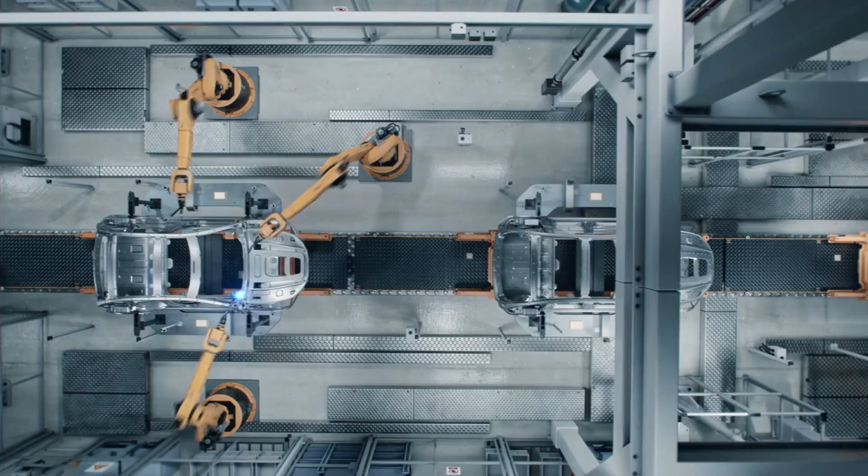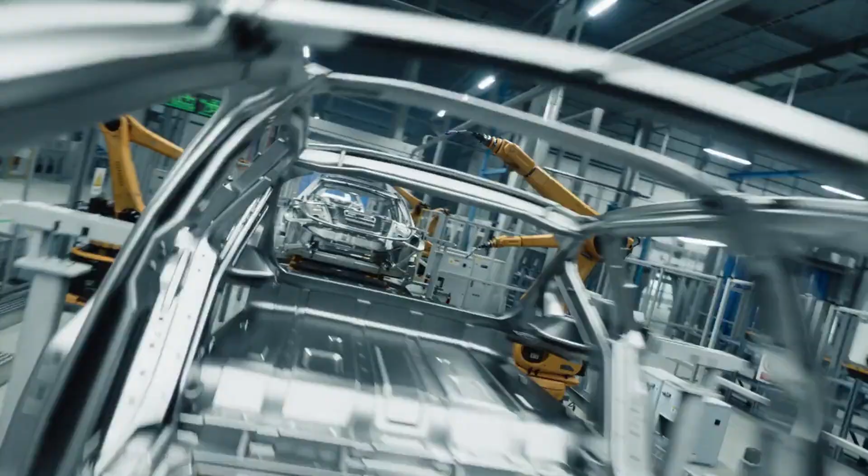A car is not a single product. A car is the result of thousands of tightly synchronized processes, all happening in the correct order, with tolerances measured in fractions of a millimeter and timing measured in seconds. Every day, thousands of vehicles roll off production lines.

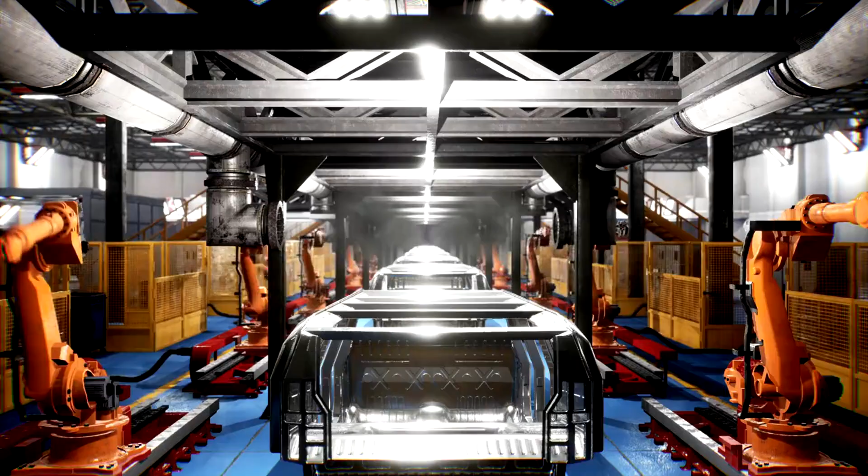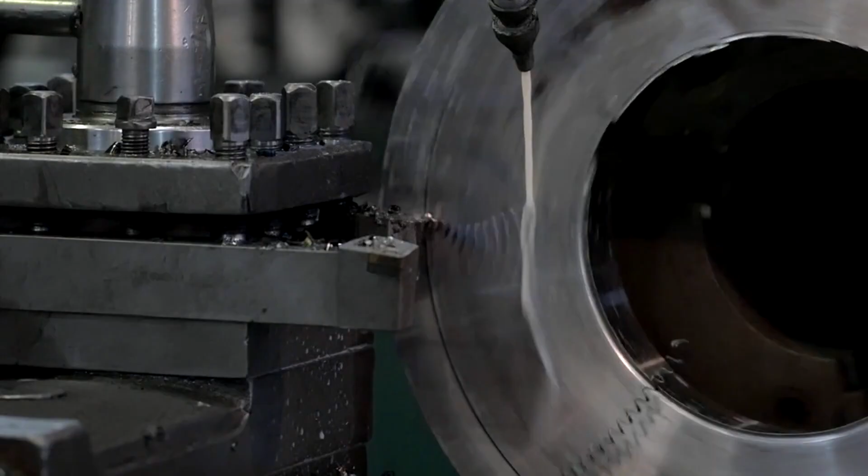But behind this seemingly routine output lies one of the most complex industrial and logistical systems ever created. When we look at a finished car, we see paint, wheels, lights, and an interior. In reality, the car's story began months earlier, long before the first visible part reached the factory floor. By the time physical production starts, everything is already decided: which steel grades will be used, where each component will come from, when it will arrive, and at which exact second it will be installed.

One disruption in this chain can stop an entire factory, costing millions in lost production.

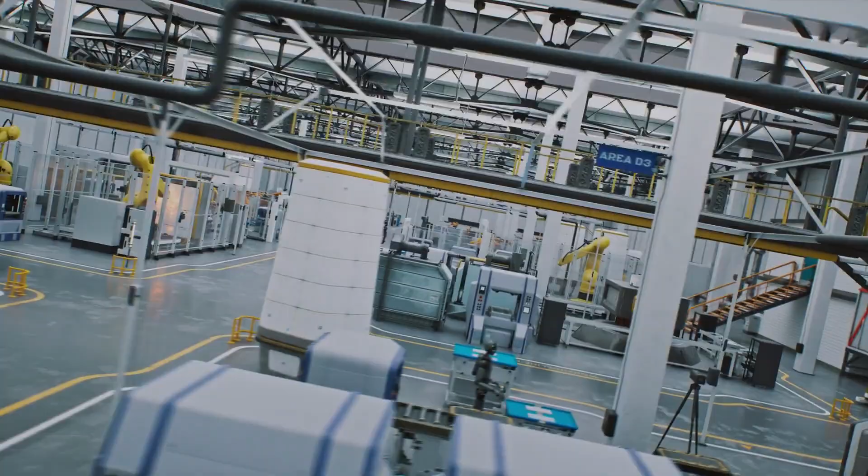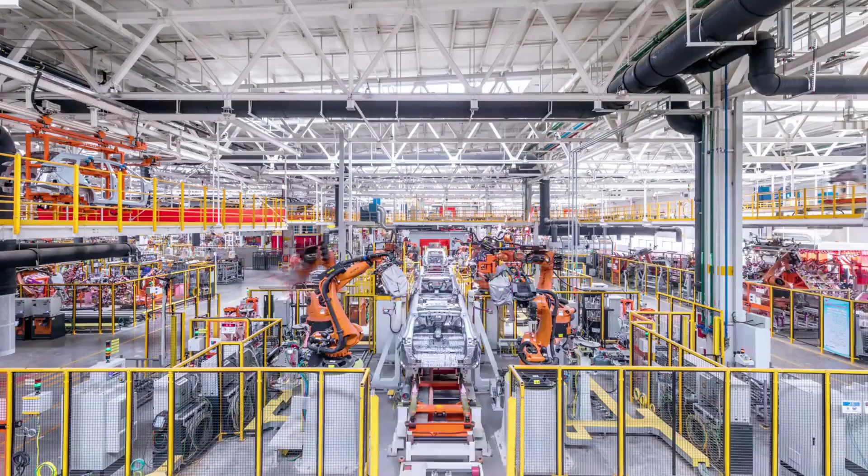The first key thing to understand is this: a car is not built start to finish in one place. It is assembled from components produced in dozens or even hundreds of factories across the world. The engine may come from one country, the transmission from another, electronics from a third, and final assembly from somewhere else. A car manufacturer is less a single factory and more a conductor coordinating a global orchestra. Modern car production is highly automated.

Robots stamp metal, weld structures, paint bodies, and move components with precision no human could match. But humans have not disappeared from factories. They are essential where flexibility, judgment, and quality control are required. No two cars on the line are exactly the same. Different engines, trims, colors, software configurations all flow down the same line.

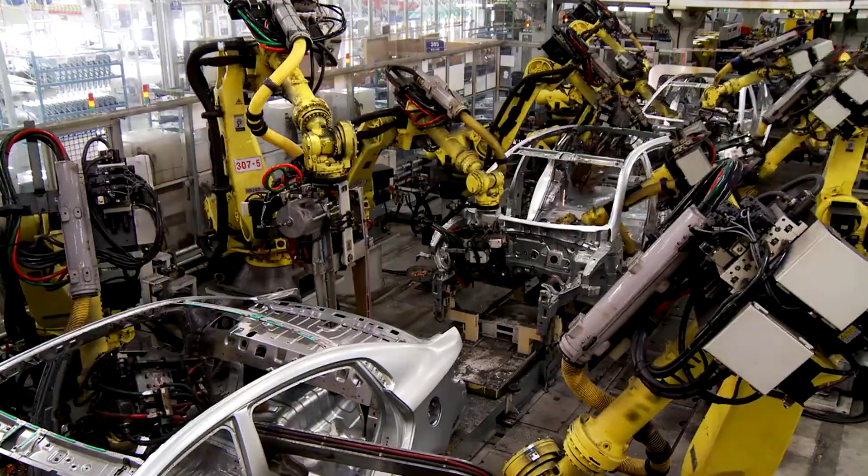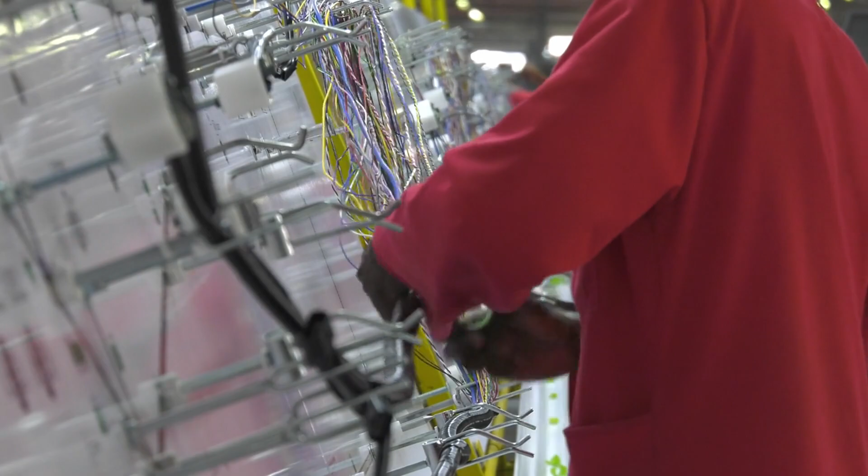There is also a major shift most people underestimate. The more modern the car, the less mechanical and the more digital it becomes. Car manufacturing today is not just about steel and bolts, but about electronics, sensors, wiring harnesses, control units, and millions of lines of software code that must work perfectly from the first start.

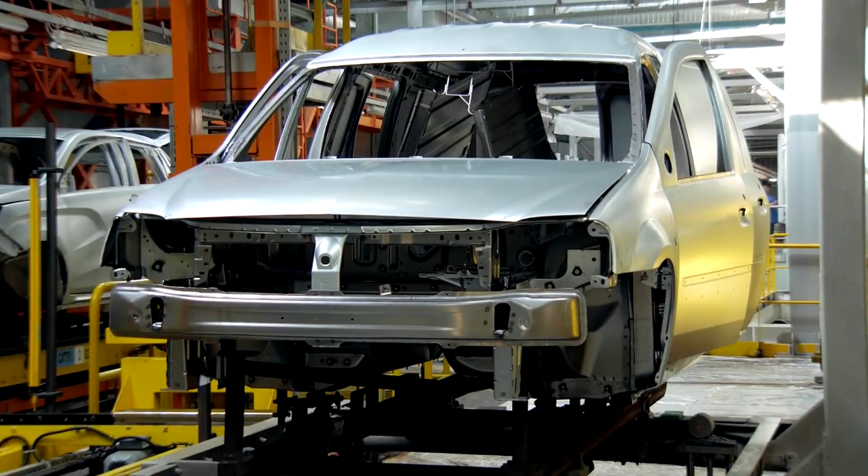Before a car ever looks like a car, it must first become a structure. The body is not just an outer shell, it is the backbone of the vehicle. It determines safety, rigidity, handling, noise levels, and long-term durability. If something goes wrong here, it cannot be fixed later. Everything that follows depends on this stage being done perfectly.

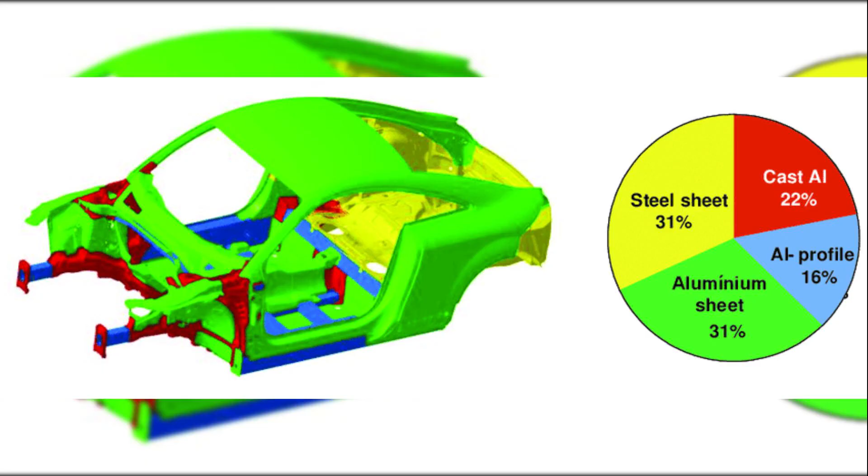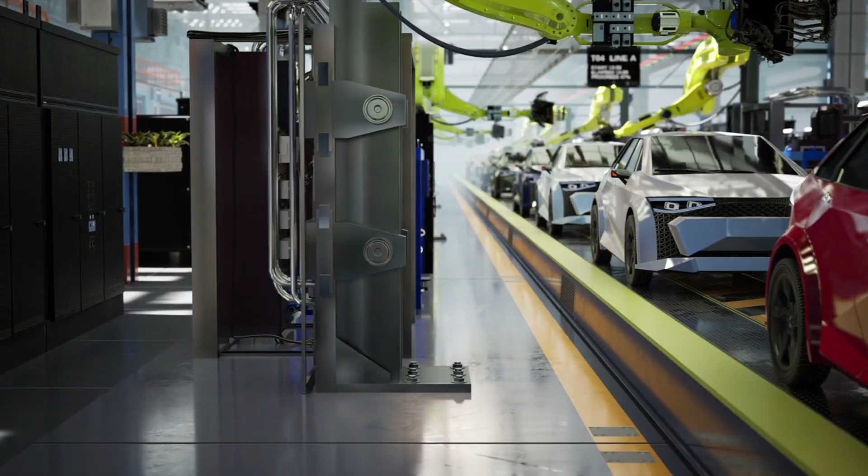Modern car bodies are not made from a single material. They are a carefully engineered mix of different steels and lightweight alloys, sometimes combined with aluminum or advanced composites. Ultra-high-strength steels are used where passenger protection is critical. Softer, more ductile steels are used where controlled deformation is needed during a crash. Lighter materials are added where weight reduction matters. Every square centimeter of the body has a specific mechanical purpose.

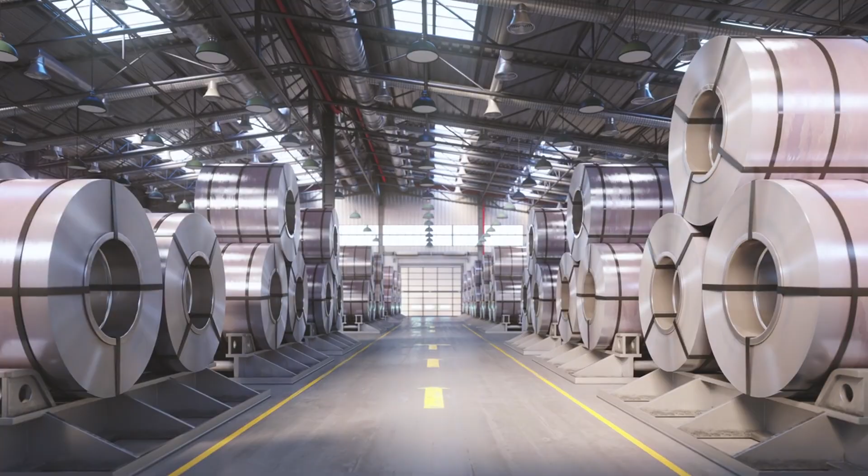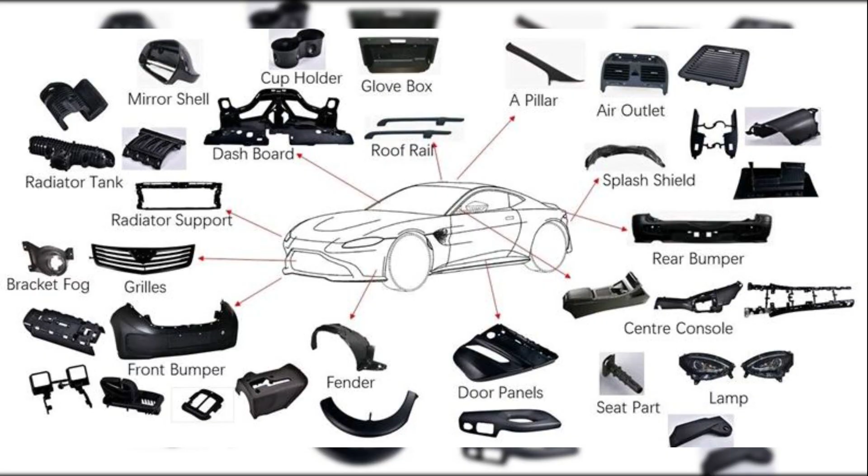The raw material arrives at the factory in massive coils of metal sheet. Each coil has a precisely defined thickness, chemical composition, and strength. These are not generic materials. Each sheet is designed for a specific part of the car: doors, roof panels, floor sections, pillars, or structural reinforcements. Using the wrong material in the wrong place would compromise safety or durability.

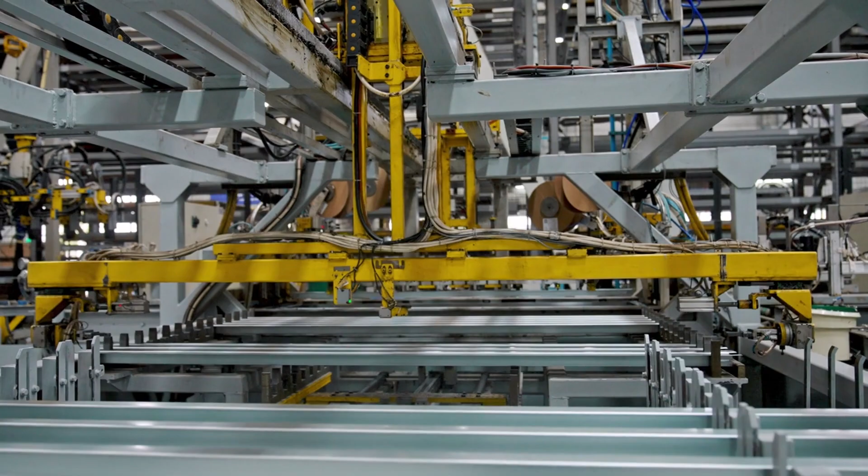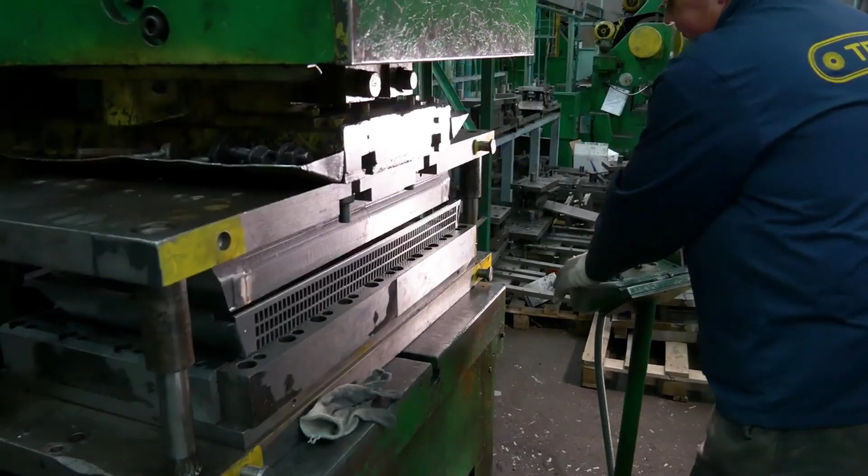These metal sheets then move into the stamping plant. This is where flat metal becomes three-dimensional. Huge presses, often weighing tens of tons, shape the metal using carefully designed dies. It is a sequence of controlled forming steps, where the metal is gradually stretched and bent into its final shape. The goal is to change the geometry without weakening the material or causing microscopic cracks.

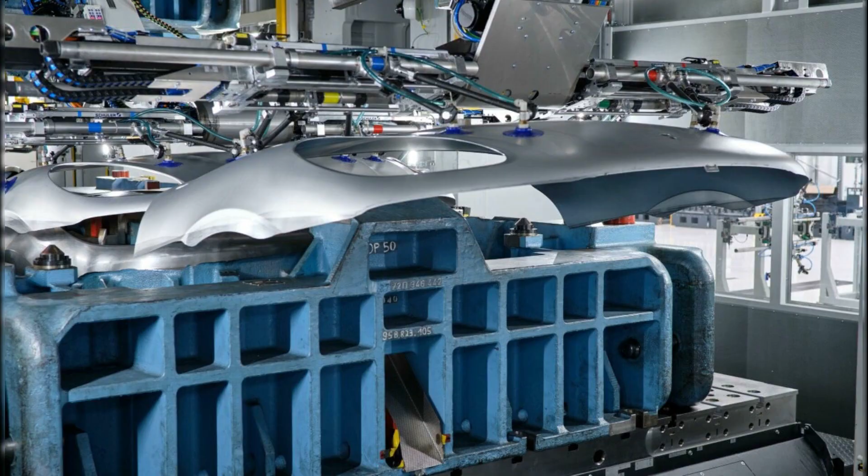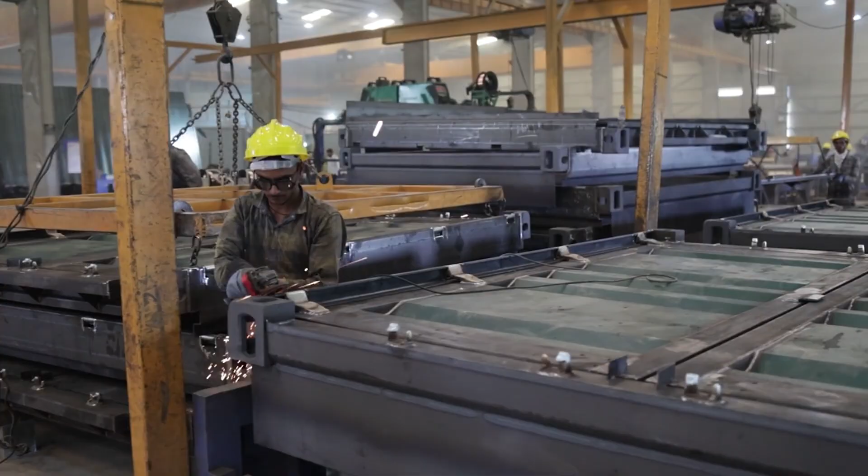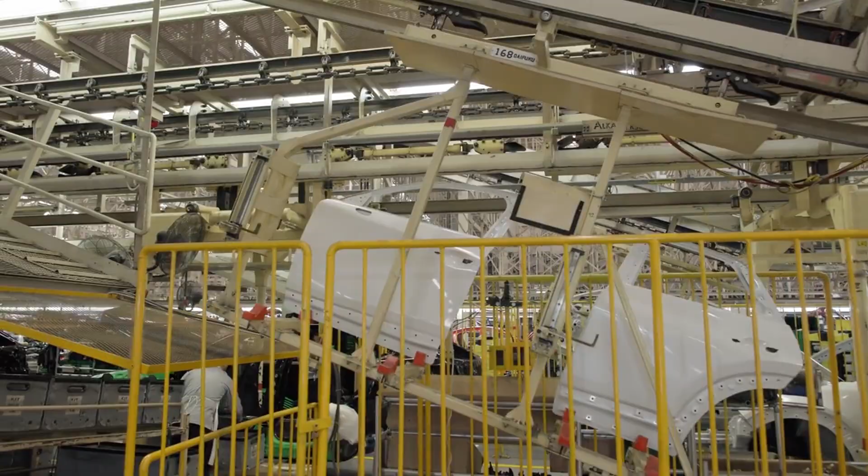Every stamping operation is monitored in real time. Sensors measure force, displacement, and material behavior. If the metal stretches too much, it tears. If it stretches too little, the shape will be inaccurate. Any part outside strict tolerances is immediately rejected. A defective stamped panel is not a cosmetic problem. It can prevent proper welding, cause misalignment, or weaken the structure.

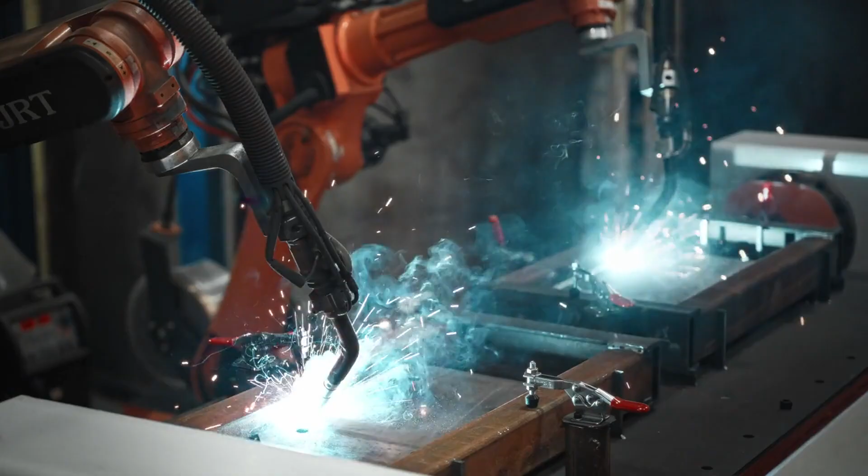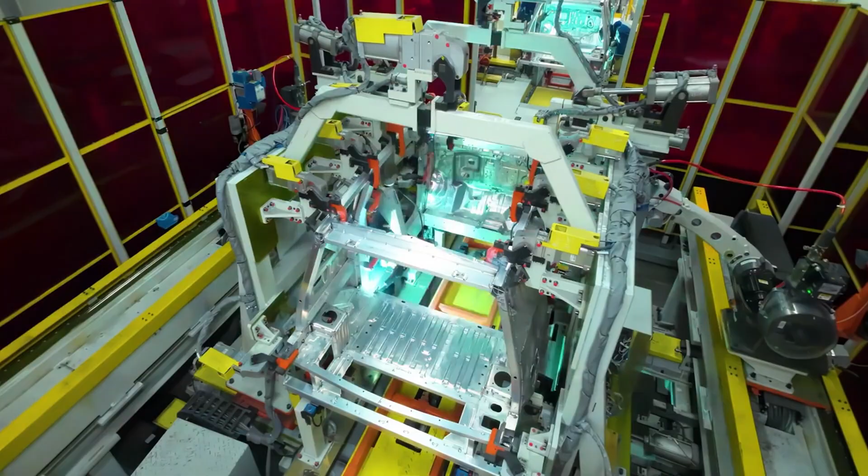Once individual panels are stamped, they move to body assembly. Here, dozens or hundreds of separate metal parts are joined together to form a complete body structure. Industrial robots perform thousands of spot welds along with laser welding, riveting, and structural bonding. Modern car bodies rely heavily on adhesives, not as a substitute for welding, but as load-bearing structural elements that increase stiffness and improve crash performance.

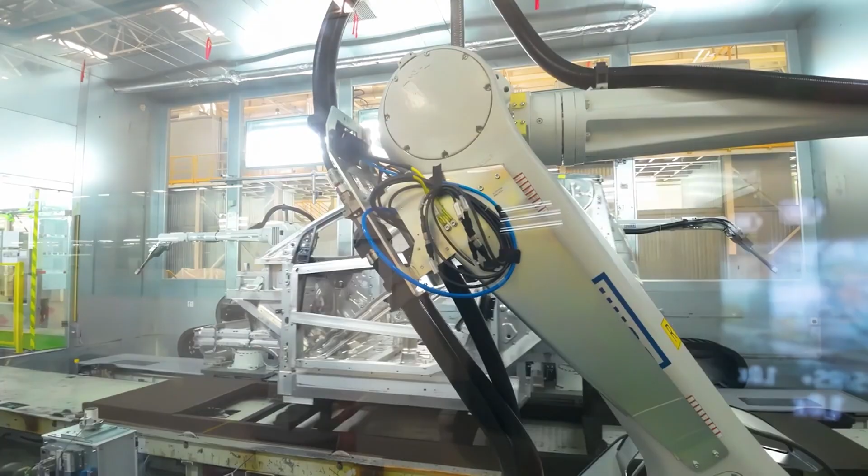Precision is everything. The geometry of the body must be exact. Even a few millimeters of deviation can cause doors not to close properly, windows to misalign, or suspension mounting points to shift.

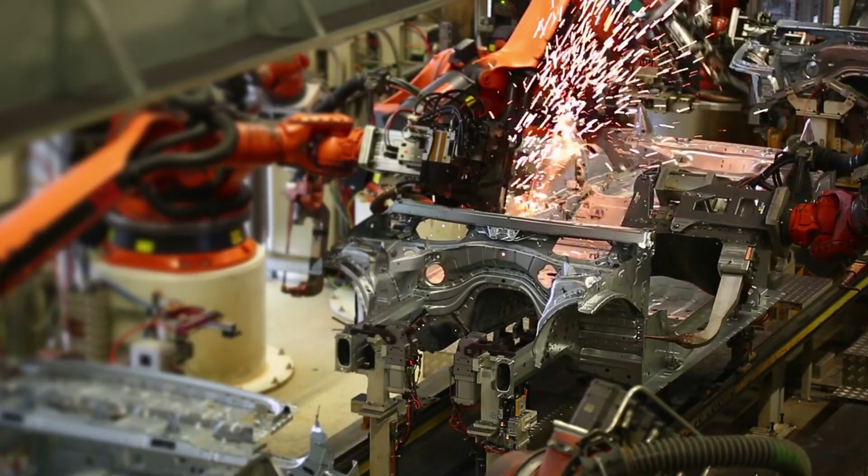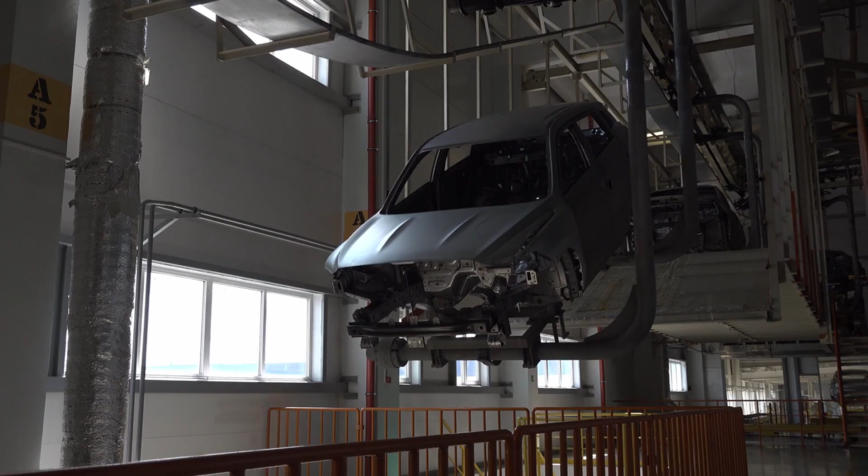For this reason, bodies are continuously measured using laser scanning systems during production. Geometry is verified long before the car ever reaches final assembly. At the end of this stage, the factory produces what is known as the body in white, a complete car body without paint, interior, engine, or electronics. It may look unfinished, but structurally it is already the car. Safety performance, stiffness, and basic quality are already locked in. From this point forward, the body cannot be changed, only filled, protected, and equipped.

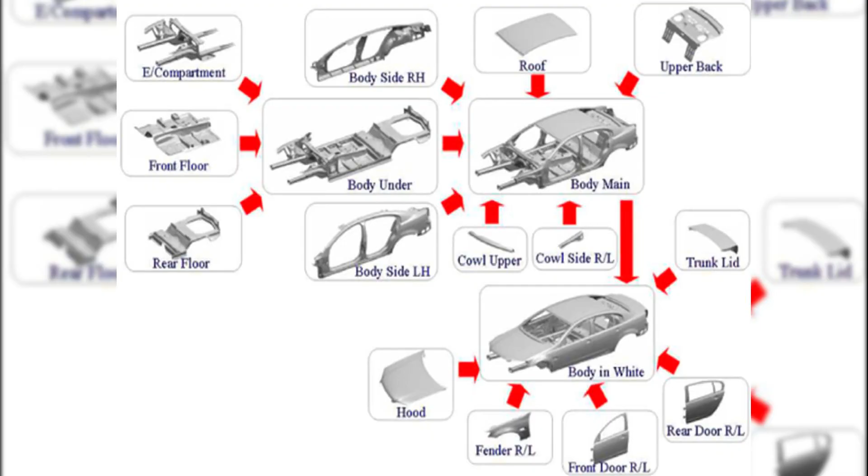When the bare body leaves the welding area, it may look solid, but in reality, it is extremely vulnerable. Exposed metal would begin to corrode almost immediately. That is why the paint shop is not about appearance first, but about long-term protection and durability. It is also one of the most technologically demanding, expensive, and tightly controlled parts of the entire factory.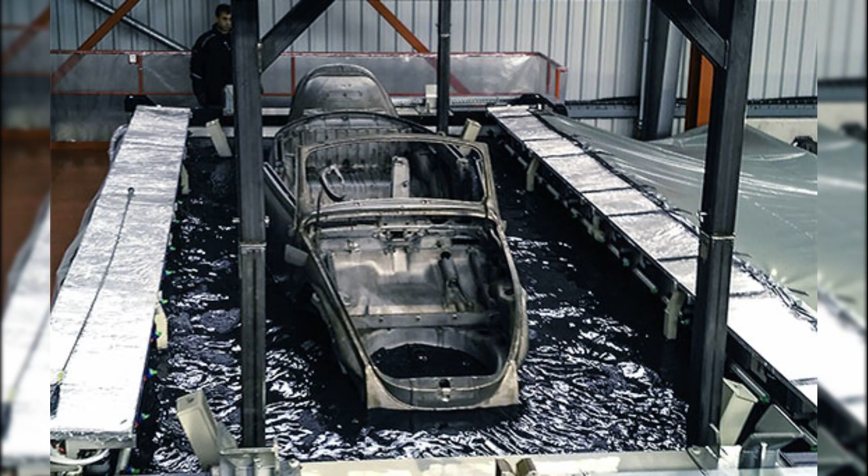The first step is not color. It is surface preparation and corrosion protection. The body passes through a series of chemical baths where oils, residues, and microscopic contaminants are removed. Every surface must be perfectly clean. Any remaining impurity would later cause paint defects or corrosion starting points.

The most critical stage is electrocoating, often called e-coat. The entire body is submerged in a bath of protective paint while an electric current is applied. This causes the coating to deposit evenly on every metal surface, including deep cavities and closed sections that no spray gun could ever reach. This layer forms the foundation of corrosion protection and is one of the main reasons modern cars can survive decades without rusting.

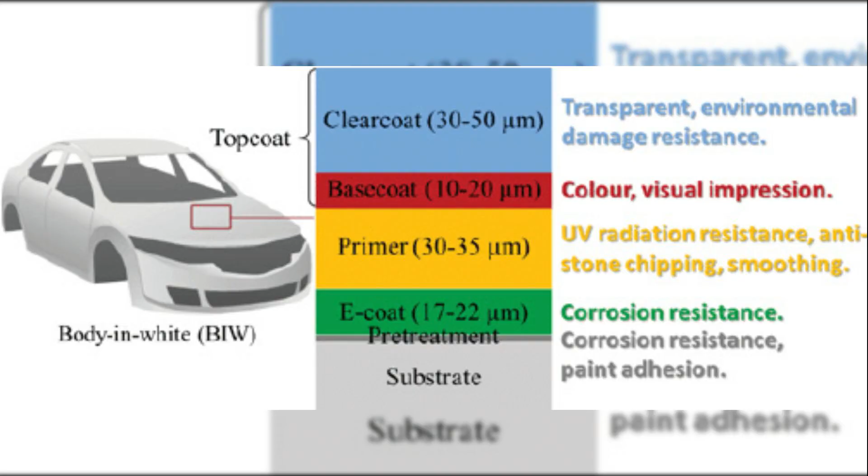After the e-coat is cured, the body receives sealants and protective materials. These are applied to seams, joints, and welds to prevent water intrusion, reduce vibration, and improve noise insulation. These materials are not cosmetic. They are structural and functional, protecting the body from moisture, road salt, and long-term fatigue.

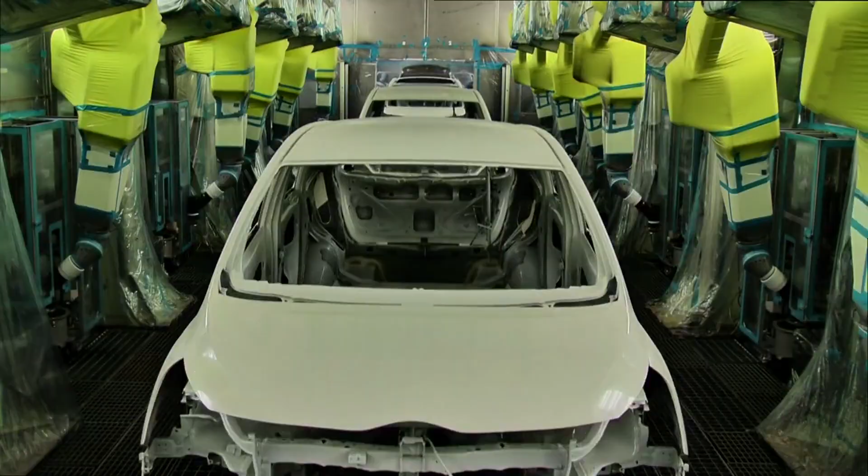Only now does the visible painting begin. First comes the primer layer, which smooths the surface and ensures consistent color appearance. Next is the base color layer, which defines the actual color of the car. Finally, a clear coat is applied to protect the paint from ultraviolet radiation, chemicals, and mechanical wear, while giving it gloss and depth. Each layer is applied with micrometer-level precision.

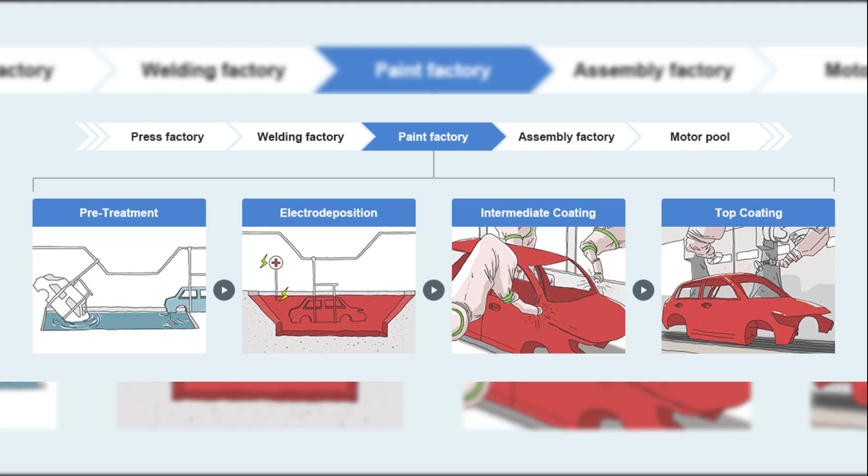Too thin, and protection is insufficient. Too thick, and the paint may crack or age poorly. Painting takes place in extremely clean, climate-controlled environments. Temperature, humidity, and airflow are regulated with near-laboratory precision. A single dust particle would be clearly visible on a finished vehicle.

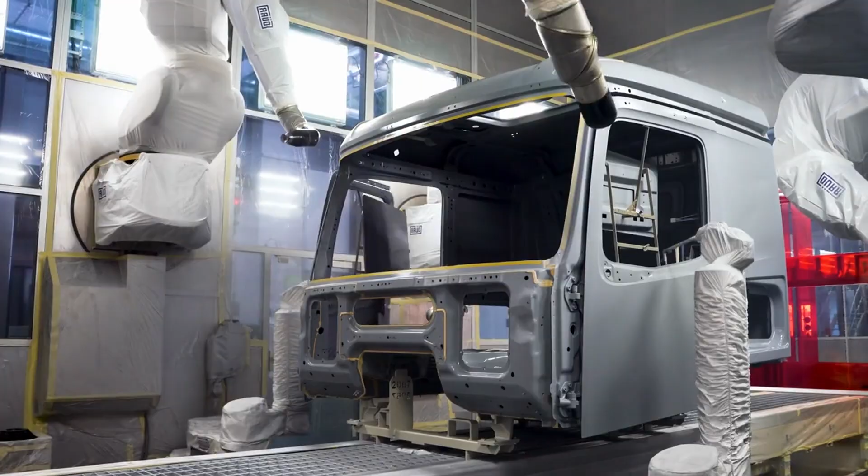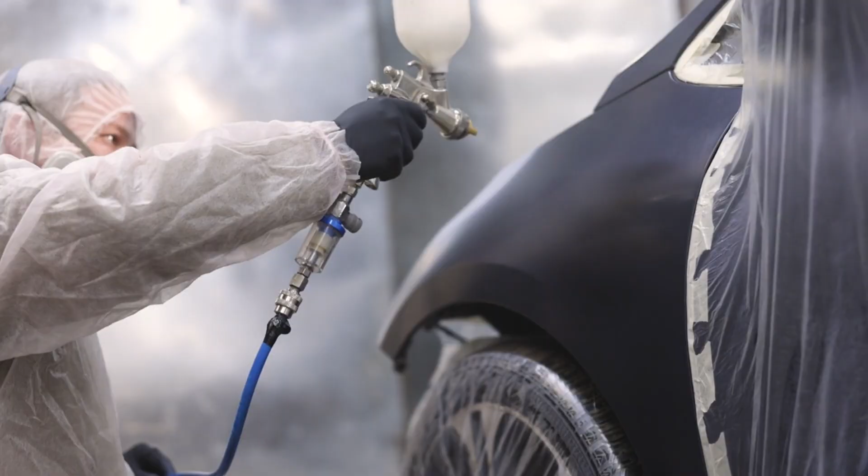Most of the painting is performed by robots to ensure consistency and repeatability. However, humans still play a crucial role in inspection and correction. Paint quality is one of the first things customers notice, and standards here are unforgiving, especially for premium vehicles.

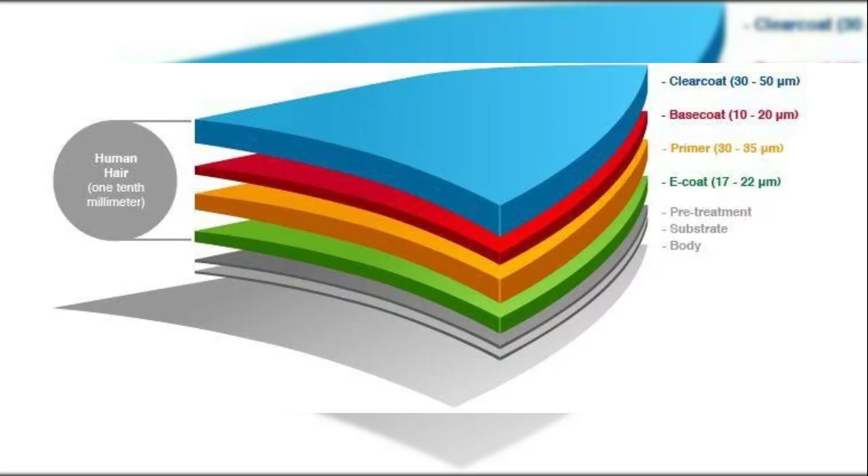After each layer, the body passes through curing ovens where the coatings harden and chemically stabilize. These ovens consume large amounts of energy, making the paint shop one of the biggest environmental challenges in car manufacturing. This is why manufacturers invest heavily in new paint chemistries and lower temperature curing technologies.

When the body leaves the paint shop, it finally looks like a finished car. But beneath the surface, it is still empty. There is no engine, no interior, no electronics. What it has gained is identity, protection, and long-term resistance to the environment.

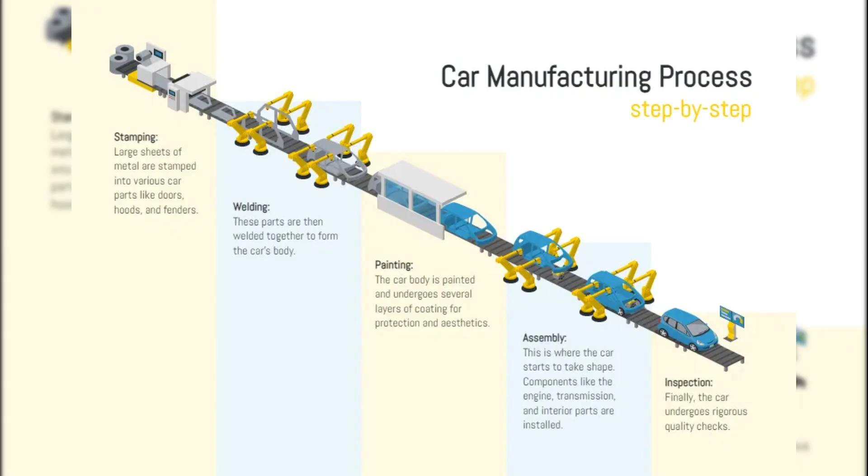Once the painted body leaves the paint shop, it enters the stage where it finally becomes more than a shell. This is the final assembly line, the place where thousands of components produced all over the world come together in a precisely timed sequence. Here, speed matters, but precision matters even more. One mistake can stop the entire line.

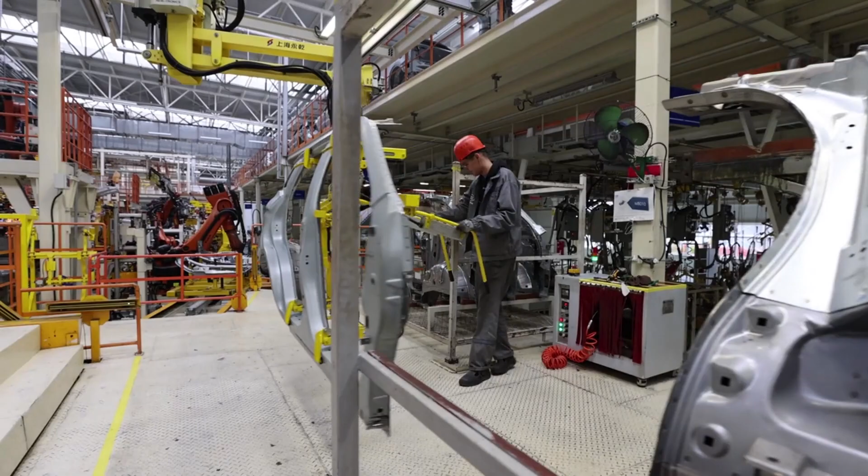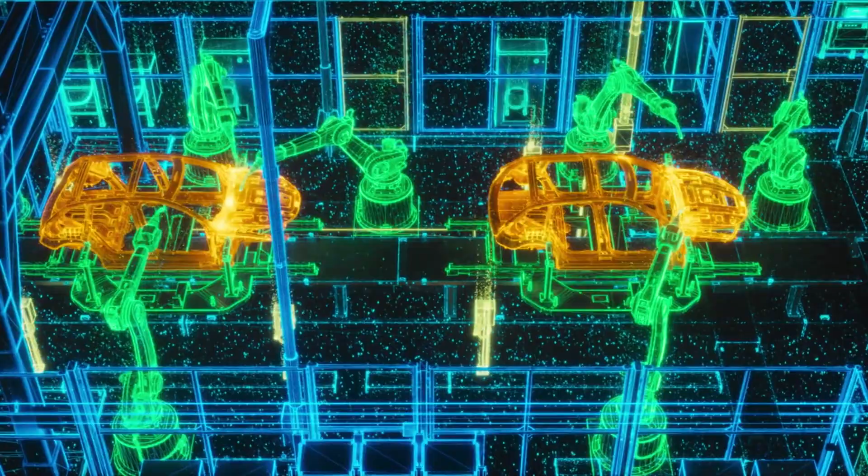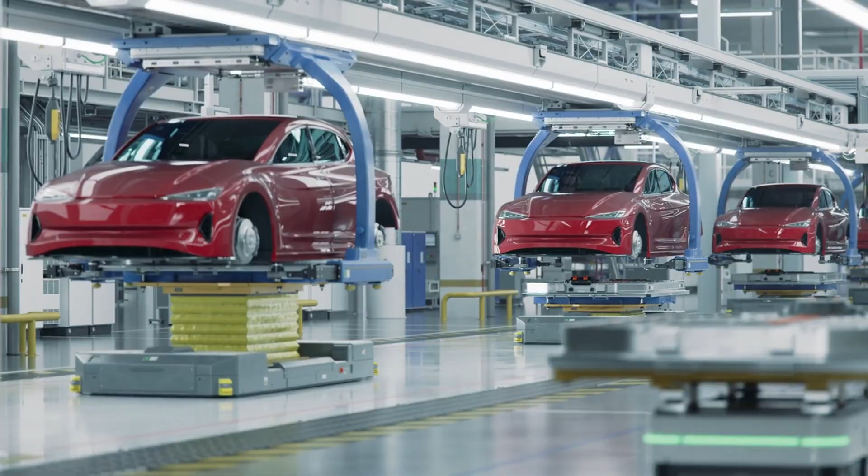Assembly is not random or flexible. Every station has a strict time window, often measured in seconds. The car moves continuously, and each team or robot must complete its task before the body advances to the next position. This is why modern factories rely heavily on just-in-time logistics. Parts arrive at the line exactly when needed, not earlier and not later. Warehousing is minimized because delays and excess inventory both cost money.

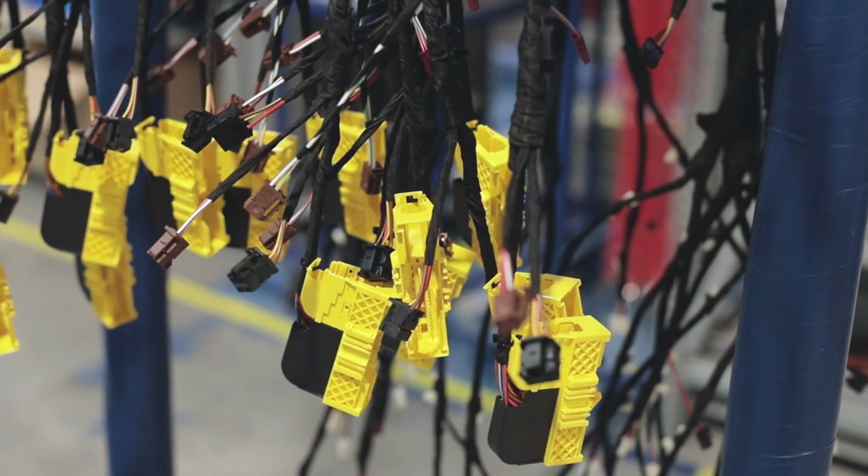One of the earliest and most complex tasks is the installation of the wiring harness. Modern cars contain kilometers of cables, dozens of control units, sensors, and connectors. The wiring must be routed through narrow channels, secured precisely and kept away from heat, vibration, and moving parts. Despite advanced automation, this step still relies heavily on human workers because flexibility and spatial awareness are critical.

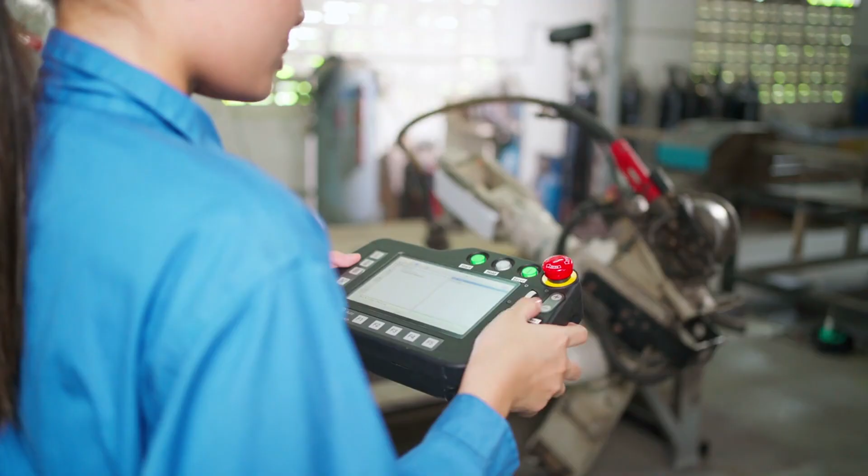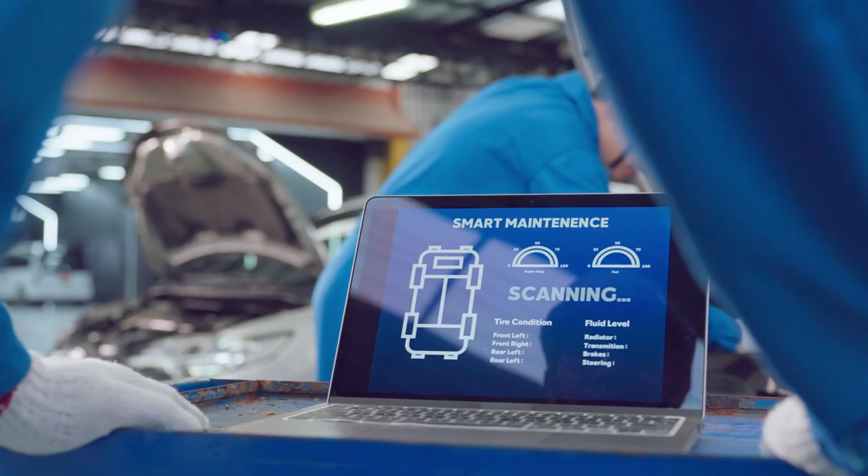At the same time, systems that will later be inaccessible are installed. Brake lines, fuel lines, climate control components, and fluid systems are mounted while the body is still open. Every fastener has a defined torque value, which is digitally monitored and recorded. If a bolt is tightened incorrectly, the system flags it immediately, and the car cannot proceed without correction.

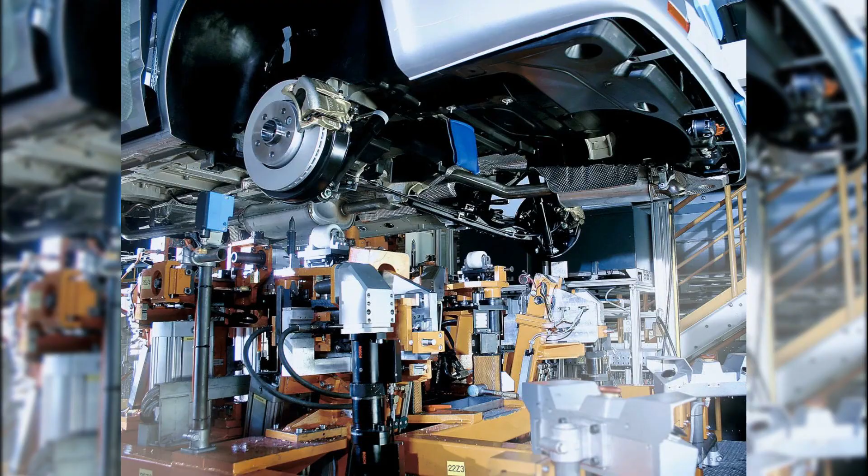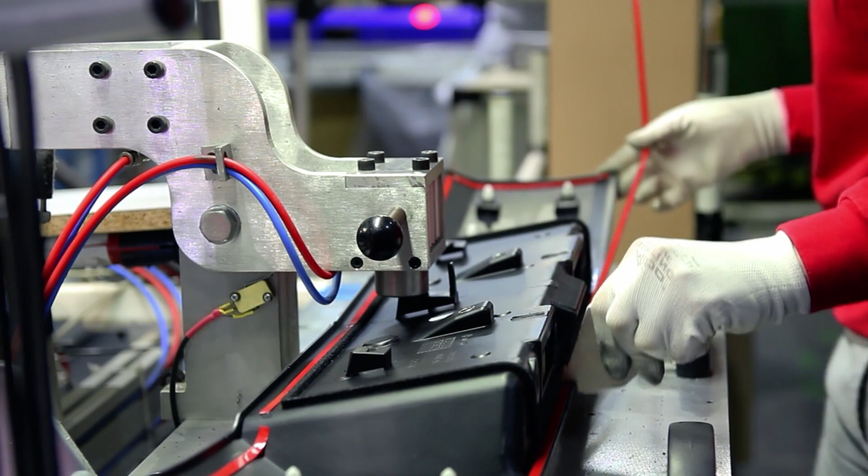One of the most important moments in car manufacturing is known as the marriage. This is when the body is joined with the drivetrain. The engine, transmission, suspension, axles, exhaust system, and often the steering system are pre-assembled into a single module. At a precisely synchronized moment, this module is lifted and bolted to the body from below. Within minutes, the car is standing on its own wheels for the first time.

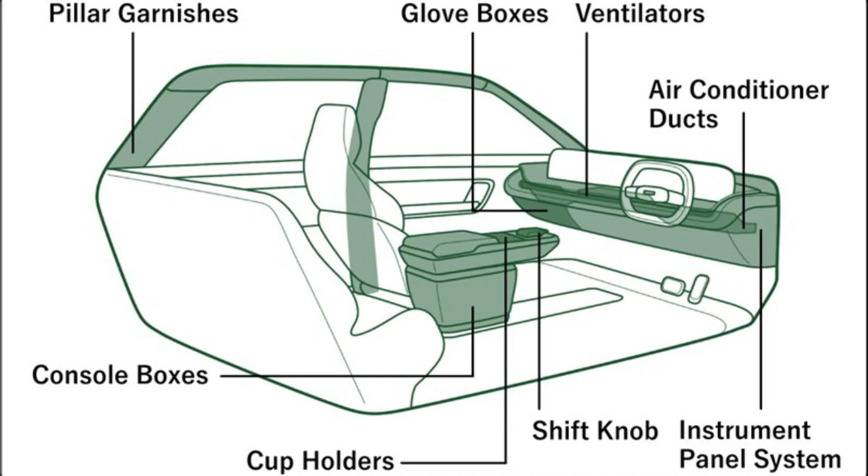Next comes the interior installation. The dashboard, seats, airbags, seat belts, door panels, screens, and controls are installed in a strict order. The interior is not just about comfort or appearance. It is a critical safety zone. Airbags, seat structures, and restraint systems must work together during a crash, which means tolerances are extremely tight.

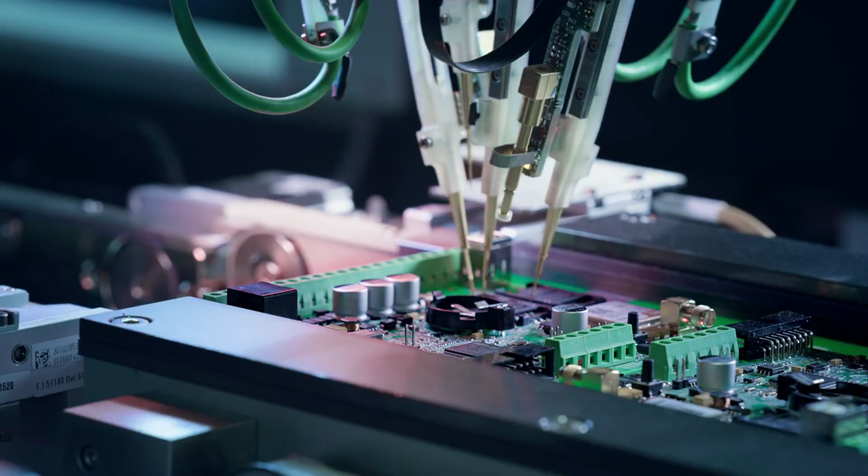At the same time, the car receives its software. Modern vehicles contain dozens of electronic control units that must be activated, programmed, and synchronized. The car is powered up digitally for the first time. Systems begin communicating, sensors initialize, and the vehicle's electronic identity is created. Without this step, the car would be nothing more than a mechanical object with no intelligence.

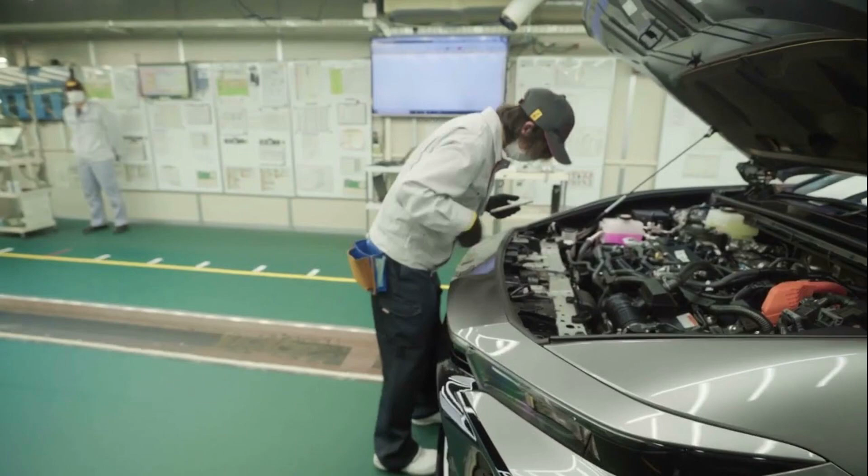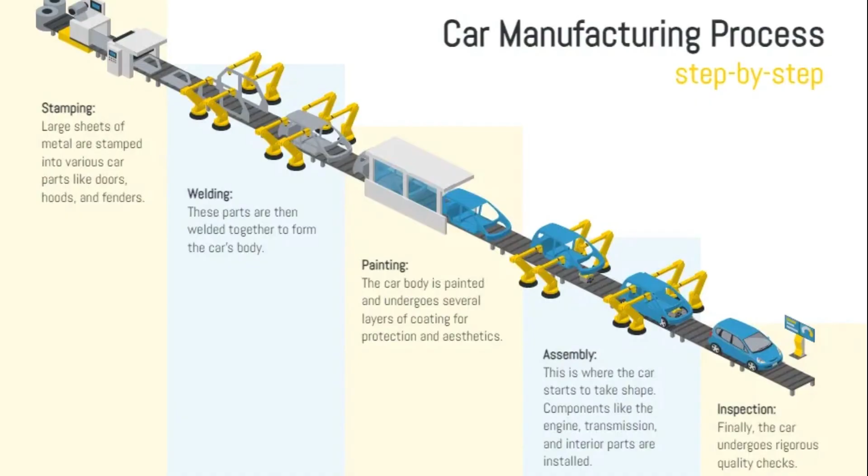By the end of the assembly line, the car looks complete. It can start, move, steer, and brake. But appearance and basic function are not enough. Before the car is allowed to leave the factory, it must prove that everything works exactly as intended.

When a car reaches the end of the assembly line, it may look finished, but from the manufacturer's perspective, it is still not approved. This final stage exists for one reason only: to decide whether the vehicle is allowed to leave the factory or must be corrected, reworked, or in some cases rejected entirely. There are no shortcuts here.

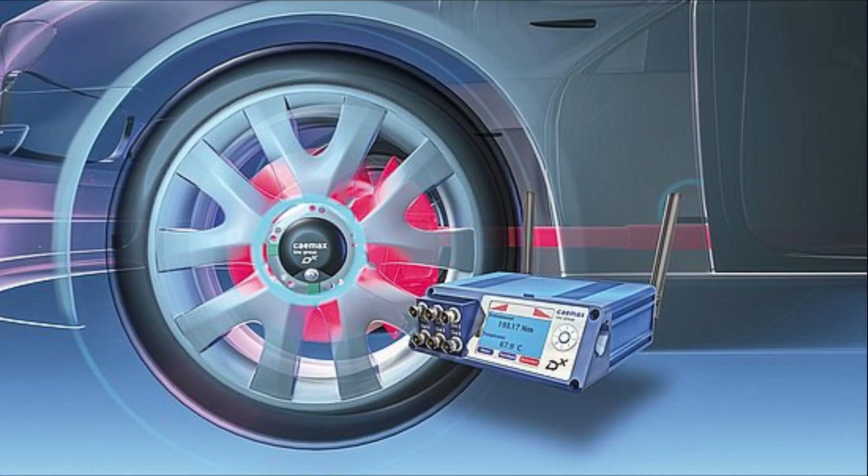The process begins with electronic diagnostics. The car is connected to testing systems that communicate with every control unit. Engine management, transmission, braking systems, driver assistance features, safety systems, sensors, and software are all checked simultaneously. Each system must respond within precise parameters. A single fault code is enough to stop the car from progressing.

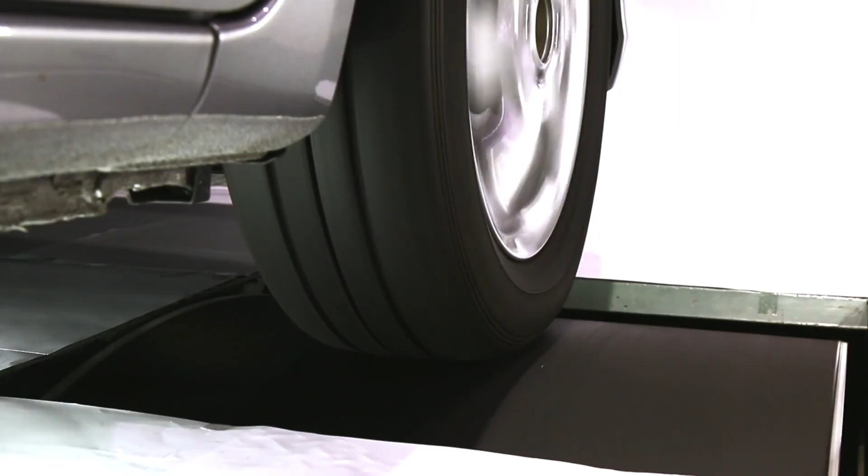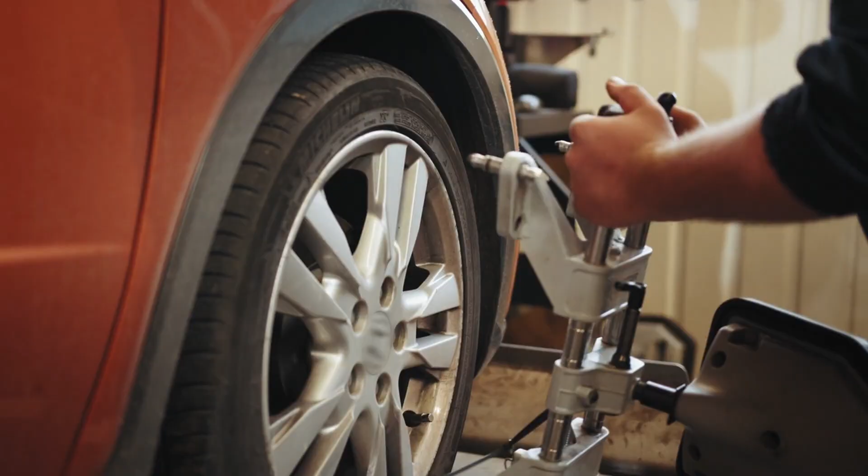Next come mechanical and functional tests. The vehicle is placed on roller dynamometers that simulate real driving conditions. Acceleration, braking, steering input, traction control, and stability systems are tested under load. Wheel alignment, suspension geometry, vibration levels, and noise are measured. Braking systems are tested repeatedly to ensure consistent performance.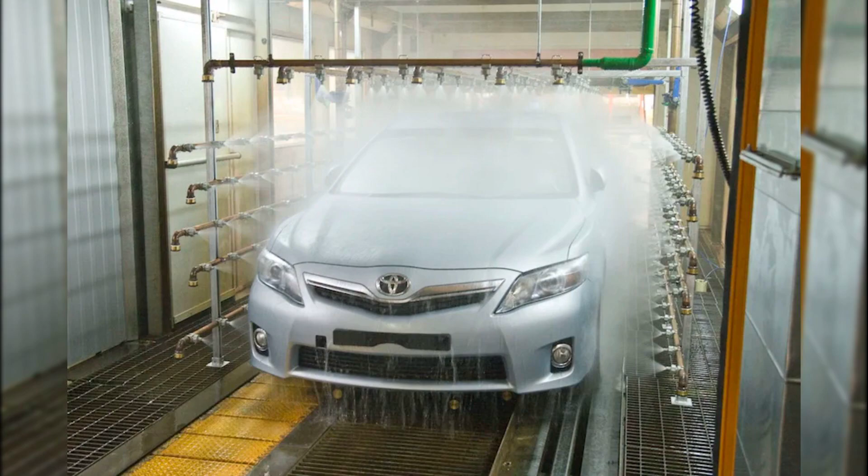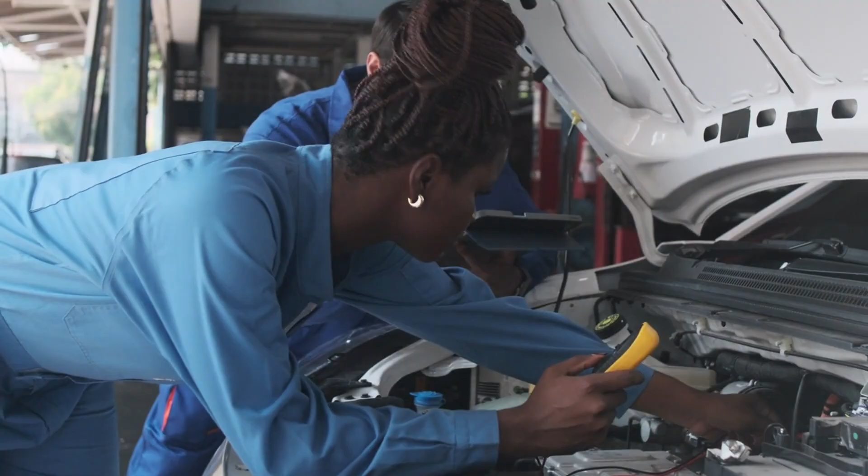One of the most critical steps is the water tightness test. The car enters a sealed chamber where it is sprayed with high-pressure water from all directions. This simulates heavy rain, car washes, and years of exposure to the elements. Inspectors check for even the smallest trace of moisture inside the cabin, trunk, or electronic compartments. Any leak is unacceptable. After technical testing comes visual inspection, performed by trained human inspectors.

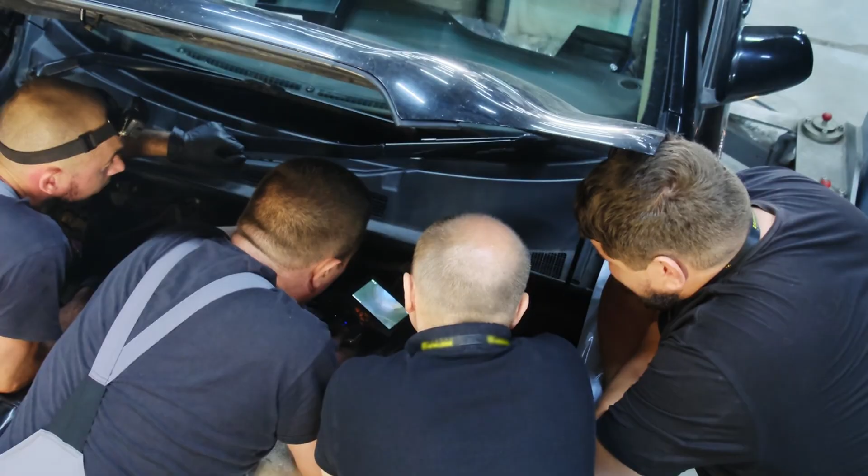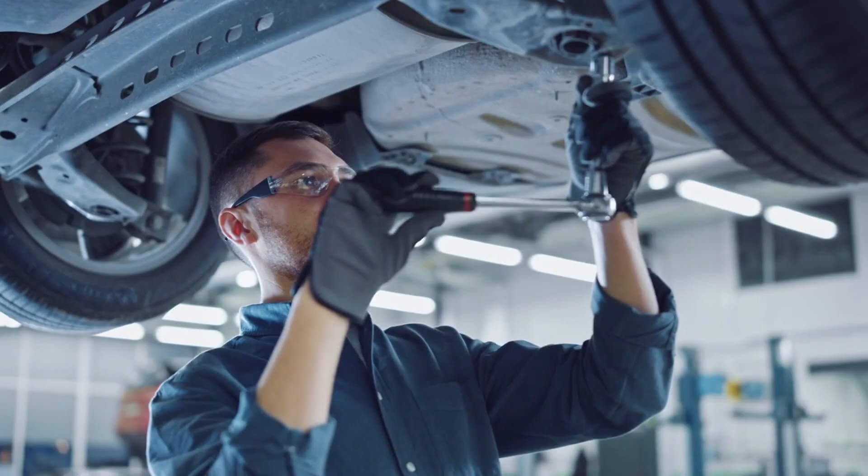Paint quality, panel gaps, surface finish, interior materials, trim alignment, and small details are examined closely. Human eyes are still better than machines at detecting subtle imperfections. This step is especially strict for premium and luxury vehicles.

Some cars also undergo a short road test. This is not a full drive, but a controlled evaluation designed to detect abnormal sounds, vibrations, steering behavior, or drivetrain irregularities. Even minor anomalies can trigger further inspection or rework.

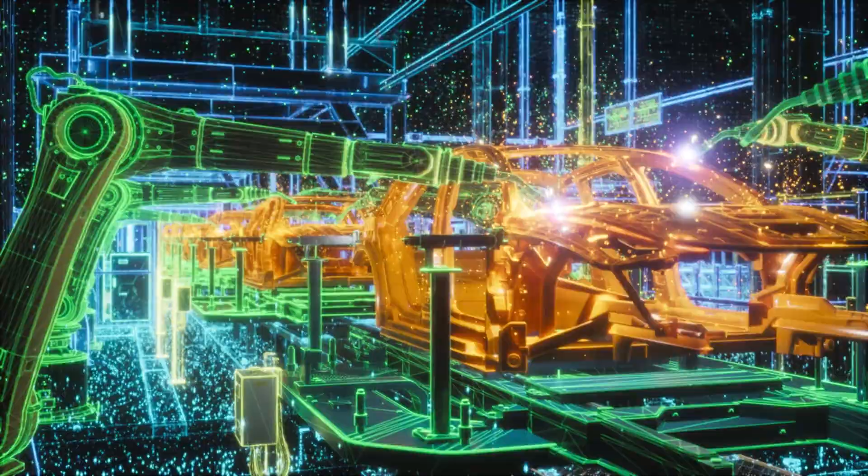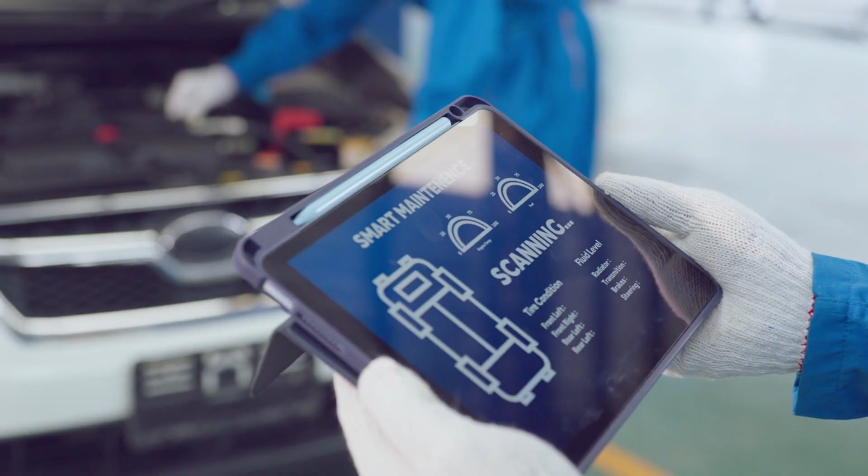It is important to understand this clearly. Not every car that reaches this stage leaves the factory. Some vehicles are sent back for corrections. Others are partially disassembled and repaired. In rare cases, a car may be removed from the production flow entirely if it fails to meet required standards. This is the cost of maintaining quality and brand reputation.

Once a car passes all tests, it receives final approval. It is registered in the production system, labeled for logistics, and prepared for transport. From here it moves to storage areas, trains, trucks, or ships, beginning its journey to dealerships and eventually to customers. And with that, the process is complete.

Car manufacturing is not simply about assembling parts. It is a highly coordinated industrial ecosystem, combining materials, science, chemistry, robotics, software, logistics, and human judgment. Every car represents thousands of precise decisions that had to be executed flawlessly. The car you see on the road is not ordinary. It is one of the most complex products ever manufactured at mass scale.